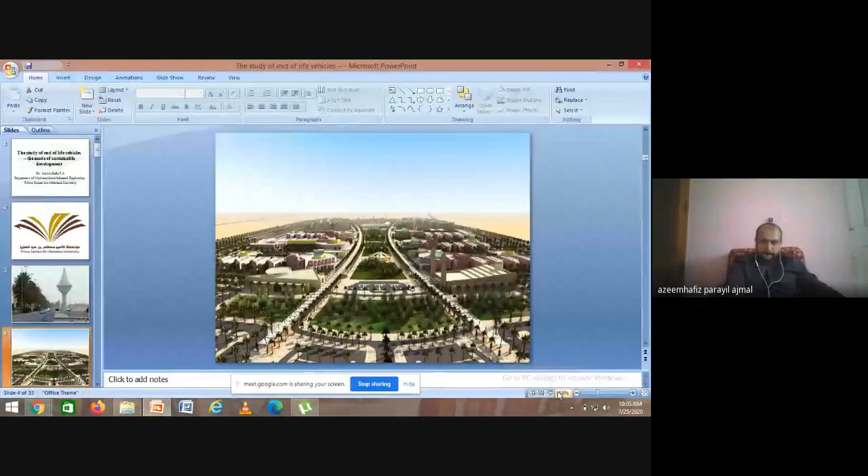We also have the university - you can see the aerial view. If you drive around the outside of this university, it will take 10 or maybe 15 minutes to go one round through the perimeter. It's a very huge university, with maybe 4 or 5 other affiliated campuses nearby in the Kharj area. We have almost 9,000 students and 1,500 faculty members, with College of Engineering, College of Pharmacy, College of Computer Science, and Business Administration.

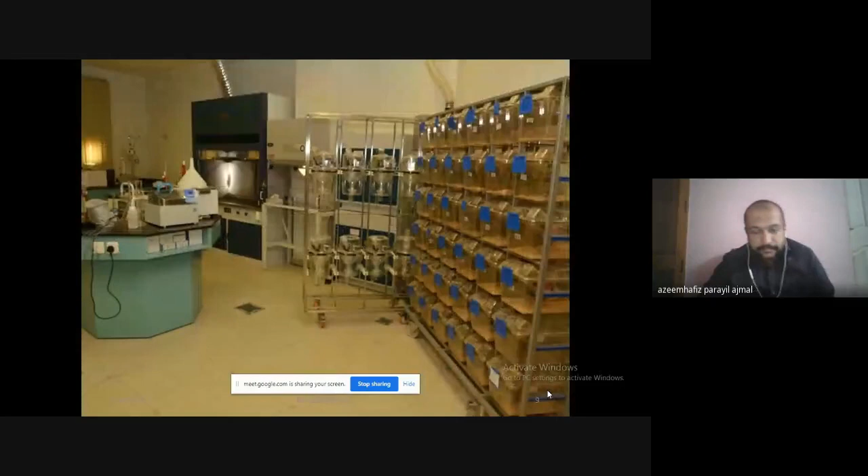So I'm starting my class on the study of end of life vehicles, the mode of sustainable development. First of all, I learned that you are from Kerala University and you have the subject sustainability in engineering, which is a course for the KTU students. It's an open book exam.

So we came to know that in the 2019 winter in Delhi, the fog was at its worst, and the visibility was at its worst. The fog is not just fog, it is smoke. Once the smoke and the fog mix, the visibility becomes its worst. It is because of too much exhaust, polluted exhaust from vehicles and from industries.

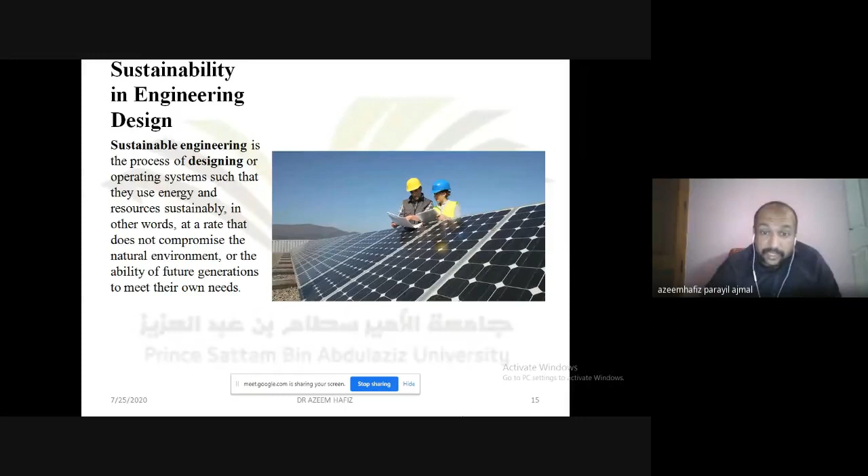So we know we are also trying to shift into non-conventional energy sources like solar energy and wind energy. When solar and wind energy are used rather than conventional sources, we will not harm the future generation's needs, because we are using something of a non-conventional type.

As you are from the electronics and communication department, I tried to find out how electronics and communication engineers can contribute. The first one is optimizing the performance output, like of a laptop or a computer. If you can maximize the battery life or output of the device, energy will be conserved.

The second thing is avoiding many hazardous components. E-waste disposal is a very huge issue coming in the future. So once you are making some components, you should try to minimize the use of hazardous components like mercury, cadmium, etc. And then you should always have this innovation part—innovation in the sense of how you can go for a sustainable design.

Always think, once you are going for any design, you should always have sustainable design in mind. It is not that you make a design which will be harmful in the future. So whenever you go for research or for a design, you should always think about how we can go for a sustainable design, and in innovation, you should go for greener alternatives.

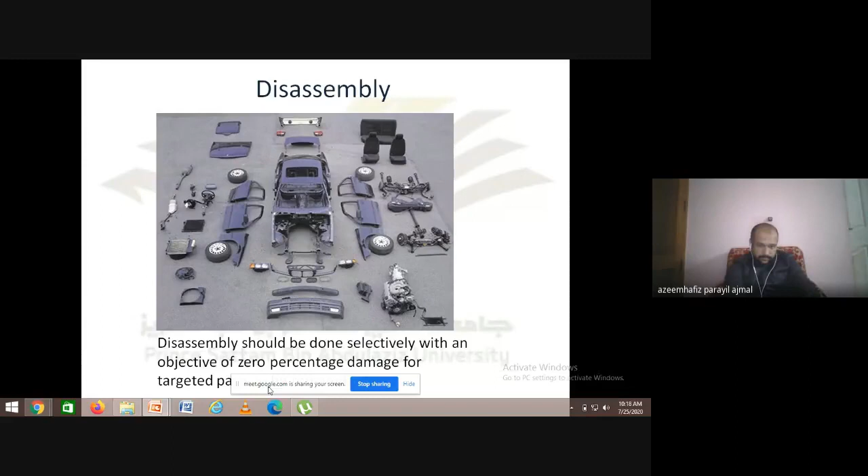So once there is remanufacturing and disassembly, the part should be obtained without any damage. We should get the part without any damage, so that we can do some work and make it like new. That process is called refurbishing.

I think if you go to ebay.com, you will get refurbished mobiles—mobile phones which you take for 20,000, 25,000. They take it as second hand, work on it, and sell it again as a refurbished mobile. I don't know whether it is still available; in 2015, eBay had refurbished mobiles. So refurbishing is the making up or reworking on a component. That is called refurbishing.

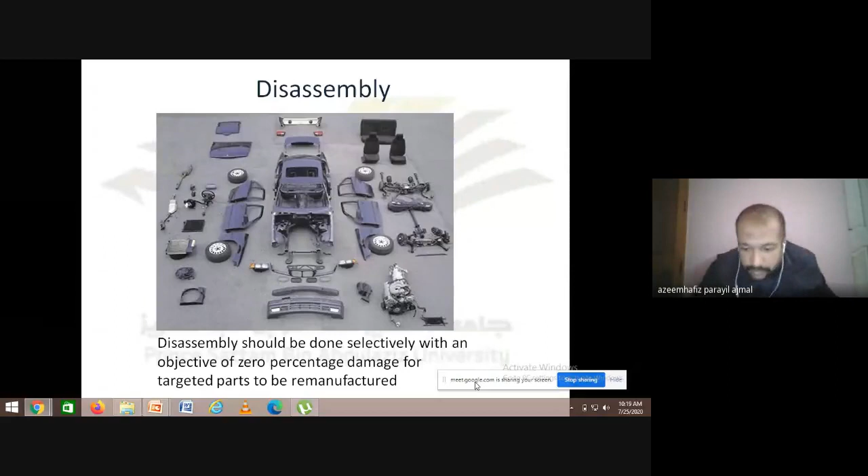The next term is remanufacturing. In remanufacturing, the products are brought back to the new condition or a better condition by reworking on the part, resulting in reduction of cost and savings in raw material consumption, machining process, and everything.

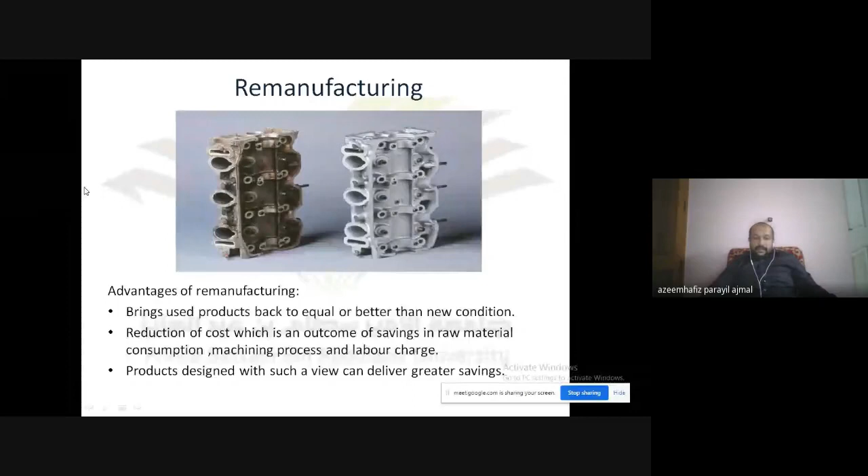So if you are going to make this engine head from a new aluminum component, it will have too much cost. Whereas once you convert the old component to the new component, you can do some heat treatment process to improve the material characteristics, and make it equally as good as the new product. So it will give you savings also.

So the next thing is, once you have the old vehicle which is almost reaching its end of life—not like the old vehicles in India, but like in the European Union, after 14 years you cannot run that car legally on your roads—what you have to do is something, just throw it away or something.

So throwing away a vehicle is also an environmental issue. The last owner may not have any money to dispose of this vehicle, so it can go to the manufacturer. That is called free take back, and free take back is one of the implications of the end of life vehicles legislation.

So now we are going to discuss what is happening—once the end of life vehicle legislations are on globally, not just in India, all the automobile manufacturers are forced to take up some actions. Like Toyota has done a lot of research, and they have brought high performance polypropylene, which is easily reusable material, and they have also developed thermoplastic polyurethane, that is TPU resin.

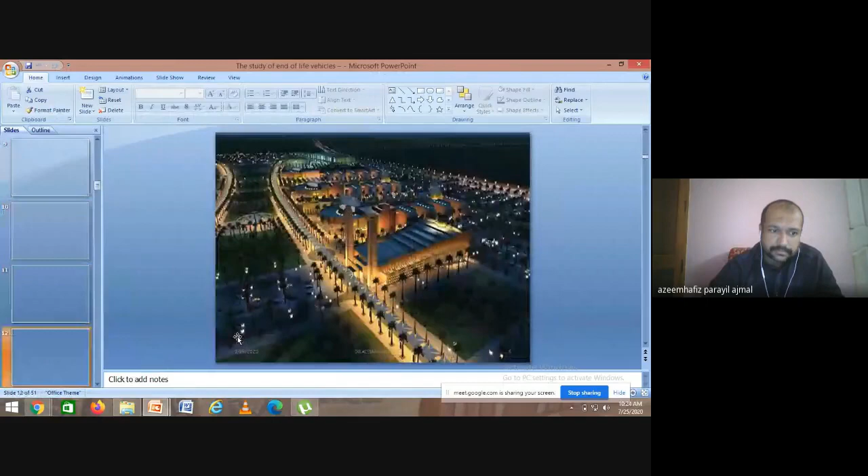Just to recap what we have told: sustainability means the design that has to come in engineering, which will not harm the future generation. So once we go for sustainable design in electronics engineering, you have to think about avoiding e-waste, going for maximum performance output of the components, as well as avoiding hazardous components in manufacturing.

Then there's my topic, end of life vehicles. In end of life vehicles, we have something like end of life vehicle legislation. Legislation means it is a set of rules which will force manufacturers like Toyota, Mitsubishi, Nissan to make something like a free take back, that is, taking back the vehicle after its life.

Then we have design for disassembly and remanufacturing. This means we should have a design so that we can easily take the component back after its life, see what is the problem with this component, and how we can make it as good as a new component so we can reuse it.

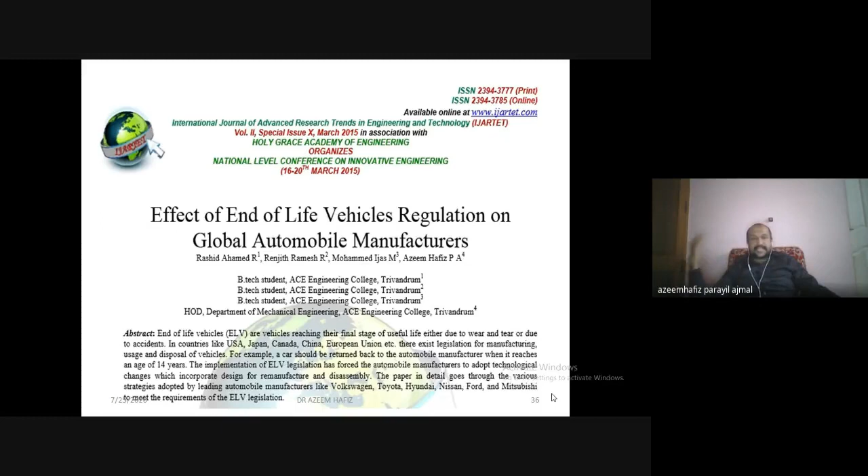ELV network basically means, like you have our state of Kerala, and you have end-of-life vehicles occurring. If we take the district of Trivandrum itself, we will have many parts like Nedumangad, Neyyattinkara, Parassala, Kattakada, Attingal. There are many parts in which these end-of-life vehicles are generated. So they are called collection points.

So you cannot set up a refurbishing center at every point. Refurbishing center means a remanufacturing center where you dismantle these cars, take out the parts, and make them as new. You cannot make a refurbishing center at every point; you should have a centralized refurbishing center.

For that, you should have a network where you should have the collection point, and where you should have the refurbishing center. So that is a real logistics problem which is coming in end of life vehicles management.

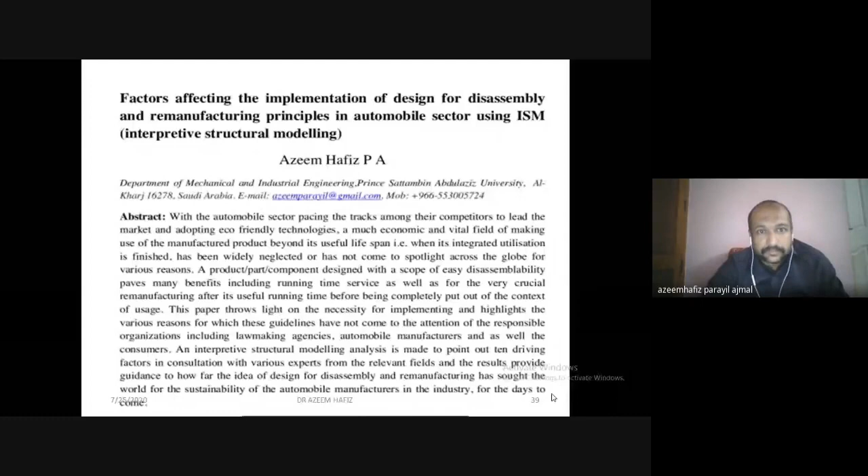As the lecture has been so boring till now, I will give a casual example about what is extended producer responsibility. Like you students—there is a student, his name is Bilal John Kurishingal. He is joining University College of Engineering as a first year student. He has parents at home and he is pampered by his parents. They provide him everything, they have done everything for the boy, and he joins the college.

And then he gets into a friendship with one girl. Any name you can call her—maybe you can call her Nayantara. So Bilal John Kurishingal and Nayantara are very thick friends, and they spend 24 hours either by phone or when they are in college together. He is so much engaged with that girl. Finally, they complete 4 years, and Nayantara gets married to an NRI American, and she leaves. Now we are friends, okay bye. And our Bilal John Kurishingal gets into depression mode. He doesn't eat, he doesn't sleep, he always sits like this.